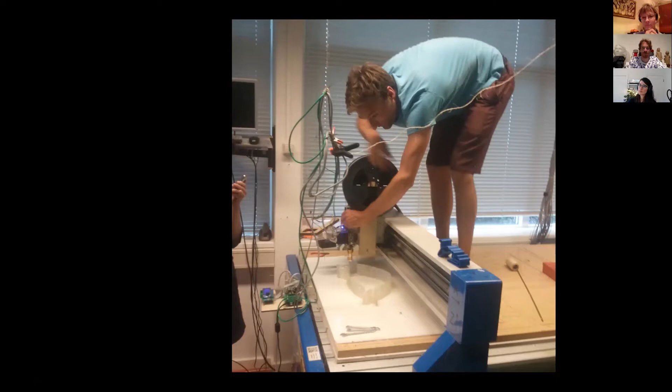Okay, when I like to make things, I test things as fast as possible. So that gives these interesting situations where you think, okay, I don't want to build the whole thing, let's test first. We need some more hands to hold it, and then see what's happening. It's not such a nice bit, sort of behind the scenes things on, okay, it barely works. A lot of things don't go well, but I'm just checking the things that do go well.

And this stems from a project you wanted to do that you needed it for, or was this the phase of finding out the possibilities? No, this was actually one of the first prototypes for making a larger extruder, I think it was for the Kamermaker, for the 3D Print Canal House, because at that time there were no granulate extruders affordable. So I was thinking, okay, if I can line up 3 wires for 3D printing in one, let's see if we can print bigger. This actually was mounted also in the Kamermaker the first time.

And here it's mounted on a CNC milling machine, where I used the Ultimaker electronics to drive the machine. So it was really also a fast hack, actually, just by bypassing all the difficult things and using the technique I know, which is 3D printers and 3D printing.

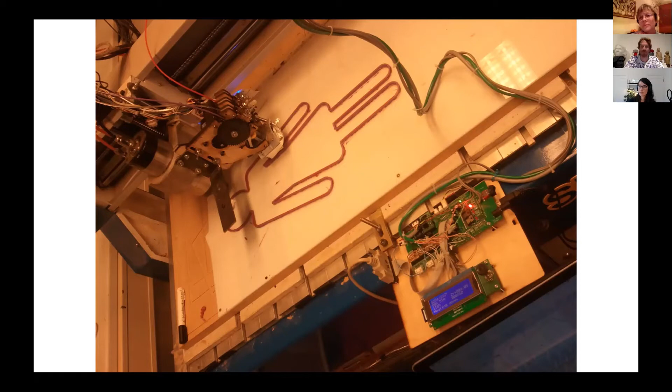And this was actually the first, maybe the first 3D print shop in the world. This was here behind me. I'm based in Amsterdam. There was a big shopping mall, Magna Plaza, and it was empty for 30-40%. They asked creative people to do something in that space for a month. And I had the 3D printer for 2 months at that time.

And I thought, okay, that would be nice. My idea was, okay, if you want to do 3D printing, I don't think it's used for prototyping. I really think it's production. And what can you produce?

And especially what can you produce for consumers and not for industrial base? So I drilled out the nozzle so there's more plastic coming out, because if you want to print something big, you need more plastic coming out, and it probably goes faster. I designed objects which you can print in a few minutes so as a consumer you can wait for it. This was actually in 2011.

One of the founders of Ultimaker, Erik de Bruijn, likes this. This was my start on Facebook also, but it's still a funny story.

What I really like is if you can create something - and that's also why Nadia likes to make things and likes other people to make things - is that if you can make something yourself, it has much more value. If you find a piece of plastic on the street, it's worth nothing. If you know this piece of plastic is 3D printed, then it got some value. But if you see it being 3D printed, then it's worth even more. And if you can push the buttons and create the thing yourself, then it's sort of priceless.

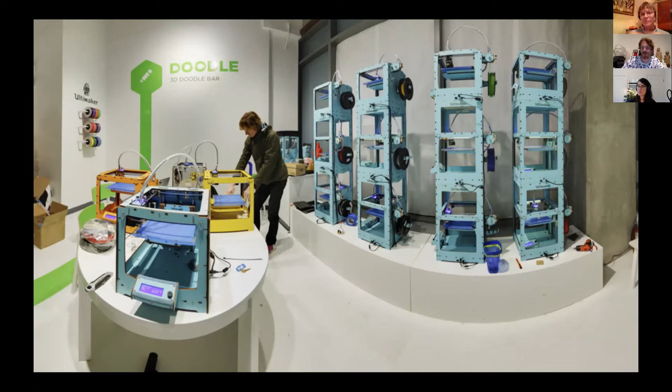But a few years later, I did the same when the Ultimaker 2 came, and that was also sort of a hobby project of one of the founders of Ultimaker and me. We said, okay, let's do it again, but not with the wooden machines, now with the new ones. And it was not really planned also inside Ultimaker.

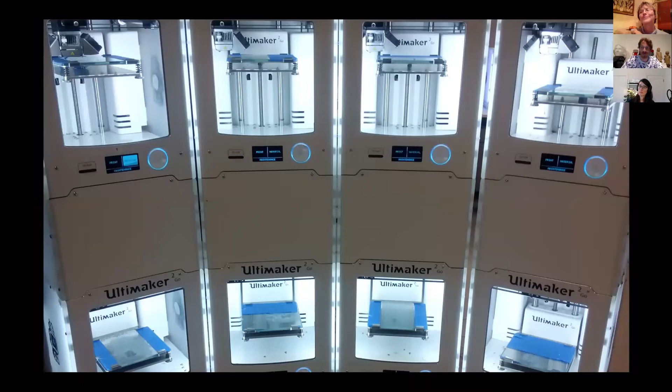That was also the fun part of it. Erik and me were making it, and once it was there, everyone who visited the company said, hey, that's a nice farm, I want that one. I think at this moment, Ultimaker doesn't sell one machine, they just sell print farms, because I think that's also the way to go.

Do you have examples of what kind of products, a lot of companies? Maybe more in general, if you want to start making things...

There's sort of a first step, should be non-visible, maybe non-functional. That's the easy part because you cannot see them, they're not really functional, so it doesn't matter if they break, but you need them. Then maybe the next step is non-visible but functional. And then the most difficult part is maybe visible, non-functional. And then the visible and functional part, that's the difficult thing. But maybe you shouldn't target that part first.

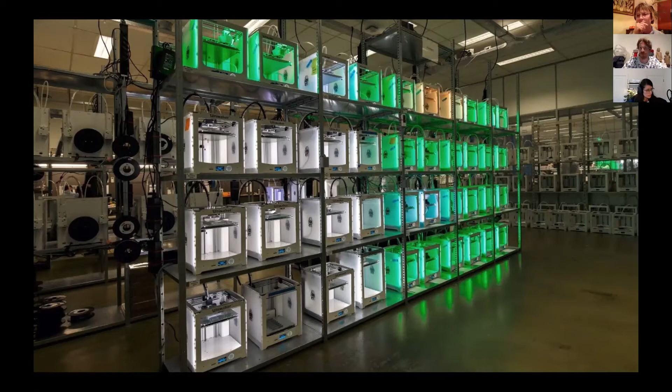There are a lot of functional parts which you don't see, where you can design for it, and then you have way more design freedom to make things. There are lots of use cases also on the Ultimaker website where they print jigs and fixtures for factories, or for robotic arms and conveyor lines. I think there's even one company in Germany, if you buy a conveyor belt with them and a robotic arm, you also get a catalog with files to make adapters for their different packaging systems. You can download them, you get the 3D printer with the conveyor belt, so you can print your own adapter. That's really the whole interesting ecosystem where you can work.

In 2013, I decided I had to flip the Ultimaker around. That's the short story. The long story was I wanted to print taller things, and in the lab we had a high machine because we could laser cut our own frame. So we built a machine which could print 80 centimeters high, and I was thinking, okay, let's make another big machine, but now for me in the studio or at home.

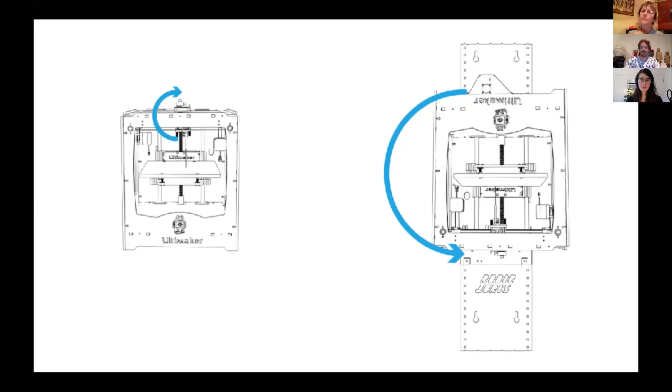Then I thought, yeah, but I already have 2 3D printers at home, then I'd have another one. Maybe I can just flip the Ultimaker around and flip the nozzle, so the nozzle points out the top, and then you can lift the machine. In one weekend, I made this prototype.

I had a sheet of wood, and these are the sliding door rails from the DIY store, the Gamma, I think. I printed the gearbox because I didn't want to wait for the China quality, and I didn't want to spend money for the German quality. I printed this, and it was actually sort of working. And I was surprised.

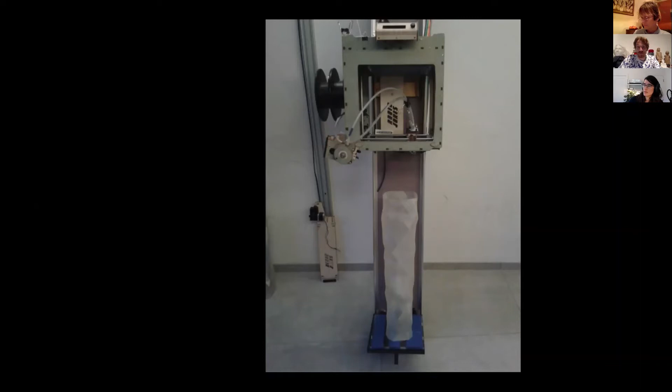A week or two later, an advertising agency came by with the question: can you print an elephant? I showed them this and said, I think I can print this one. Three months later, this was actually printed live at the Schiphol airport.

I did the same trick as flipping the Ultimaker. I designed and developed the rails to hang the printers on. This was a whole product development from start to end within 3 or 4 months.

For the Netherlands, that's extremely fast. I think in the Netherlands, from idea to market takes about 2 years on average. I really like to have a purpose to develop a product within such a short amount of time.

I did it the same way as I did in the lab, just by making things very fast. These rails were made of laser cut steel, but even then I did 2 or 3 iterations within 2 weeks. I made the file, sent it to a company who could laser cut it, it was digitally fabricated, and I got it back a few days later. I could test something, make an iteration, make a different shape, do adjustments, and make the other thing. That's something I really like to see.

That's also the sort of beta testing of product design, and it's still not a final product. If I want to make another one, I can make exactly the same, but I can also adjust the files a little bit and make something different for the next run.

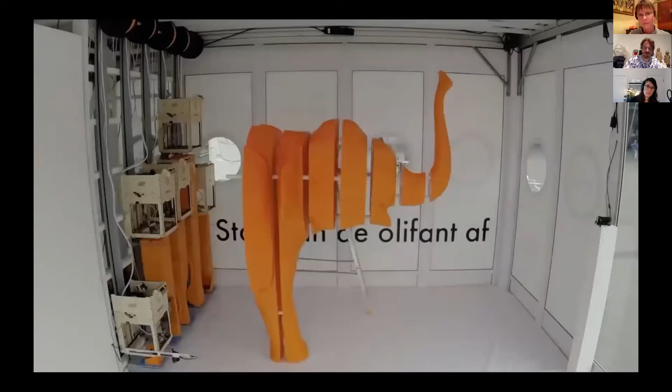There's a time lapse on the website where you can see the machines go up and down. It was actually a commercial, a campaign for the World Animal Protection - if you promise not to ride on elephants again, your name got engraved into the skin lines of the elephant.

Everybody was surprised that this concept kept staying alive at every meeting with the advertising agency, because they first had it as one of 3 concepts of what we could do. Every round, this one just kept moving forward, to the next round, to the next round. And then we actually had to print the elephant, so that was an interesting process.

In the end, the printing was not the problem, but the whole workflow to get the prints done was more difficult, because you had to get the names on, and I didn't know today what names to print for tomorrow.

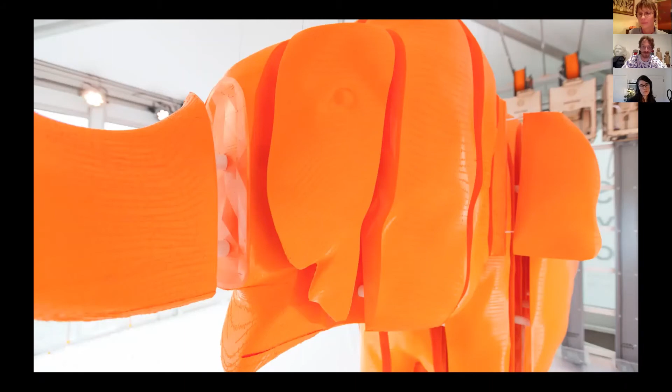At one point the 3D files were almost 2 or 4 gigabytes to slice into layers, so the whole processing was really difficult. I had to buy new laptops, and even then it was almost impossible to print. But it was a nice project.

I have one of the sheets we used to show at Protospace. We called it product development in a maker's way - you make small iterations, you can directly test into the market, and if you want to make something, you don't need a lot of investment.

That's also the way I think a lot of products can be developed, and then you can learn from the market. In software it's quite normal to have a beta product, but in hardware it's more difficult to make beta testing.

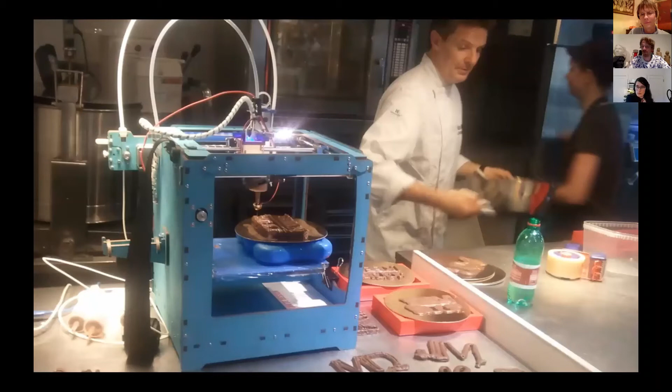This is one of the other experiments. I think most of my ideas start as a sort of serious joke, and most of the time I don't want to spend too much time on it because I don't know if it will work. So if I spend like 1 week, 2 or 3 days on it and see the potential, then maybe I do something else. But if I don't see the potential, it just stops, or it lays on the shelf until something else comes by.

This was just before Sinterklaas, and we have these chocolate letters. The idea was to print chocolate initials or logos. I went to the chocolate store around the corner, because I was thinking, if you want to print in chocolate, you don't need to be a technician - you need a chef in chocolate, because the printer part is the easy part, and the chocolate and kitchen part, that's the difficult part.

If you see 3D printing or digital fabrication as tools, then I really think that mastering the tools is way easier than mastering a profession like being a chef or something else.

You can better learn the profession, how to use the tools, than as a mechanic. If you know how to use the tool, you learn the other profession. So it's the other way around.

These small experiments were small things, but these objects are actually solid chocolate sculptures. I must admit, these are not printed in chocolate. The whole process of these sculptures is a project by Renzo Martens, who also had a new documentary at IDFA this year. The sculptures are made in clay in Congo, on the former plantation, and there they were 3D scanned, then 3D printed, and then molds were made. In those molds, the chocolate was poured. So it's quite a process.

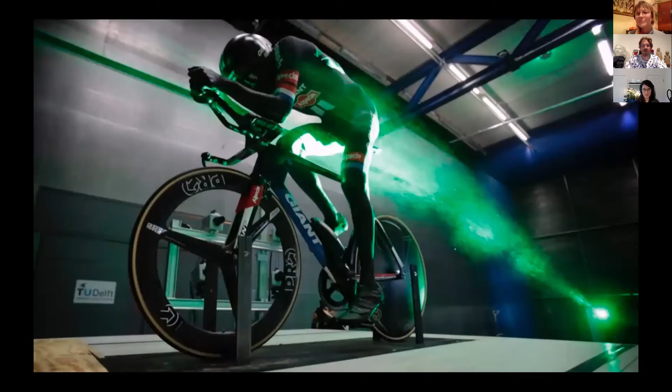What you see here looks very fancy, but this is a very strong laser beam, which you don't want to point at human beings. What you normally do in a wind tunnel test is blow against the object and see how much force is needed to push it back. Here they're blowing very tiny soap bubbles filled with helium, so they have the same weight as air. You can light them up with the laser and follow the bubble to see how the airflow goes around the object. It's a sort of interesting special technique, and now they were able to do that on the real Tom Dumoulin.

This is another project, also some sort of science thing. This is actually a 3D printed statue, but it's done with a dual head printer I have here, and it's not just two colors, it's really like grayscale imaging.

The interesting technique behind this was by somebody doing his PhD now at TU Delft, who worked at Ultimaker. He found that if you put layers on top of each other, white and black, you get gray. If you move the black more out, you get darker gray, and if you move the white more out, you get lighter gray. He made software so you can do grayscale dithering, and then you can really get grayscale.

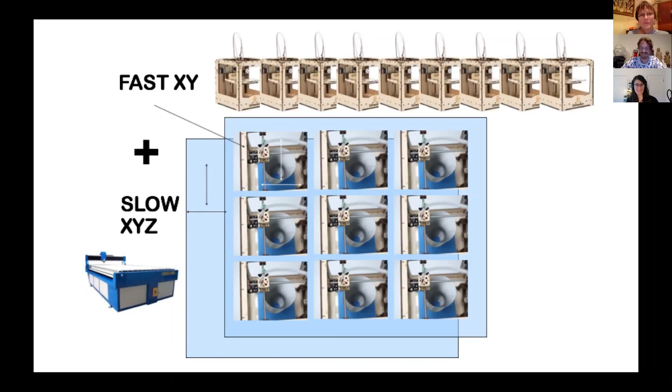That's a short presentation of projects and things.

I'm muted. Thank you so much, Joris. A virtual applause, for you. It's really interesting. Maybe we can bring in Nadia, since you have to leave at 8 o'clock, Nadia. But I still want to ask - we still have the question about the 3D robot printing.

Stijn is asking: have you tried resin 3D printing with a video projector on a transparent floor?

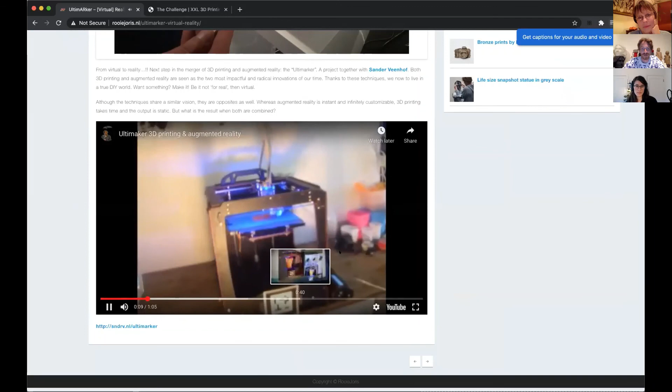I did - wait, can I share the screen again? I did something with augmented reality, this one. That was the idea, together with Sander Veenhof. We made a quick prototype in one afternoon, made a marker here, and then you could see what would be printed. It was actually about getting the physical and the virtual to be the same, together.

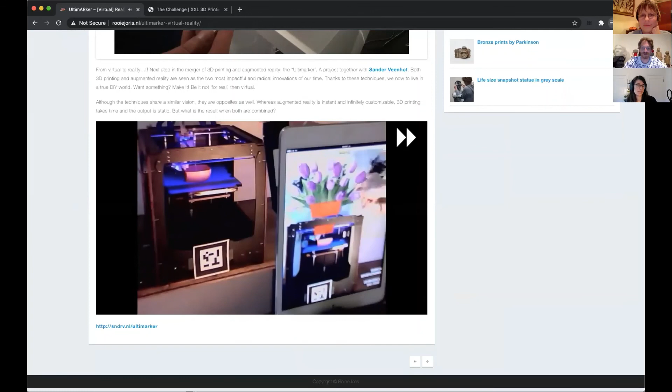Nice. Stijn, you were asking about really big things. Is it okay that I save the question so we can give Nadia the floor as well? Joris, you're staying, I hope? Yeah. So everyone, keep pushing questions also for Joris. There is one question about software that you might want to look at. Thank you very much. We're not finished talking and discussing, I think. But Nadia, I would like to give you the opportunity to share some insights with us.